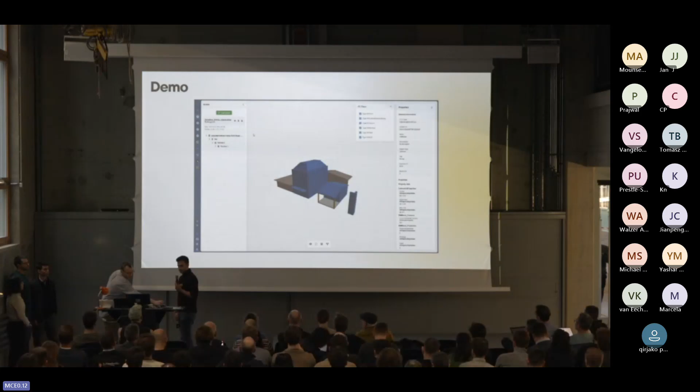So here's the interface. You can load your model here, and as you see, there's this 3D model generated from the IFC, sorry, from the IFC that is loaded.

And if you click this button here, all of the intersections are analyzed, and you can see all of them here, and also the type of connection, like point, surface, line, number of them, etc. And if you click on them, it goes into detail and shows you the connection.

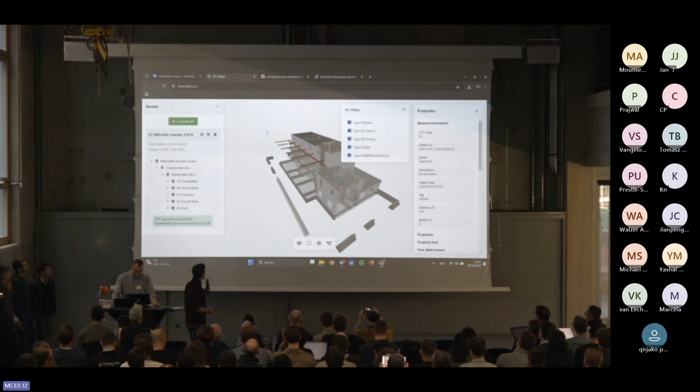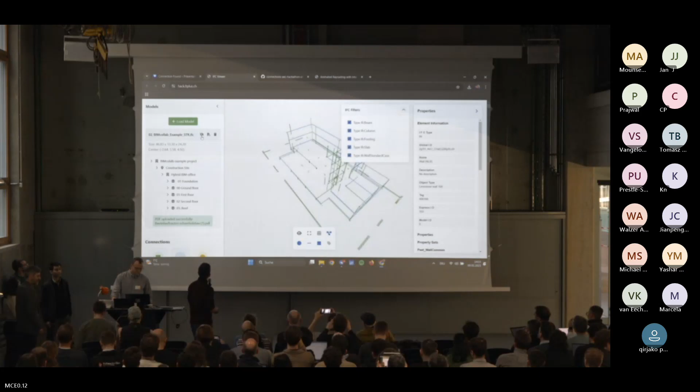Yes, that's it. Thanks. So I'll open the presentation again.

Okay, yes, sure. Sorry. So, pros and cons of the approach.

The tools that we use are all open source, so that's a big advantage. It is fast in loading and showing the preview, and it's also user friendly, as you see, so there's no high-tech knowledge required.

As cons, as already mentioned before, we have low precision for detecting the intersections. The tolerance was 10 millimeters, which can definitely be higher. And it is strongly IFC dependent, so if we get a high quality IFC, it would work perfectly fine.

Another thing I want to mention is that our team was also very multidisciplinary. We had timber engineers, software developers, computational designers, all of them in a loop, so we could evaluate this approach pretty well.

Just very quickly to wrap up, because we're out of time - what about the future? What we thought is that there are small improvements we could still do on relatively short notice.

But on the long term, what we think is adding a graph-based detection and categorization system together with historically tracking and matching the projects of the industry in general or the specific company, combining it with machine learning and LLM would be very beneficial.

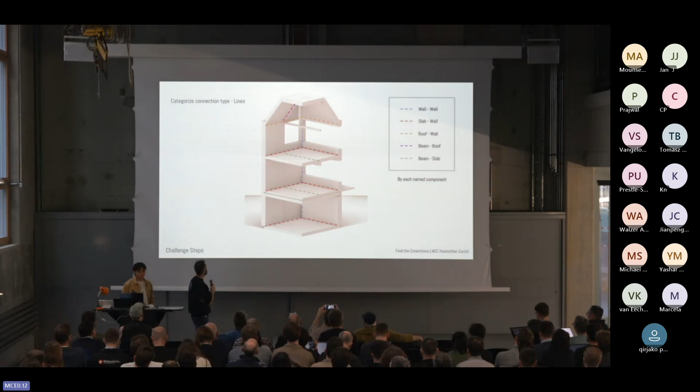And the third challenge was to find the connections and try to categorize them based on the elements that they connect and their geometry. We ended up working on one of those three.

This is the finding of the connections, and I'll let Yen now talk about the solution. So instead of ray tracing, we take more of an algorithmic approach.

First we extract the IFC data, then we get the geometrical data, and also the property sets. From here, we test the intersection, basically what is near, because in the IFC model each entity is not aware of what they are near to.

So from there, we create a new graph structure, and from this graph structure we traverse through it to get direct and indirect connections. In the ideal structure, it's like this.

We have the original IFC object, and through a dictionary we create a new node. The reason I create a new node is because I don't want to traverse through the IFC API. So I just create this graph structure, and then every node is aware of what is 'near.' In the future, you can turn this 'near' into a vector.

Not everything is just 'near' — it could be 'up,' 'down,' something like this. So while every element is aware of what surrounds it, one of the problems is that they don't know about a corner, because a corner is created when three elements join together. So we also have another algorithmic approach: we find a loop.

Basically, if there's a loop and the element comes back to itself in three steps, then there's a corner. So here you see the wall, node A to node B to node C. If node A is also reachable in the next step, then there's a corner there. One of the criteria is also that it has to be either a slab or a wall.

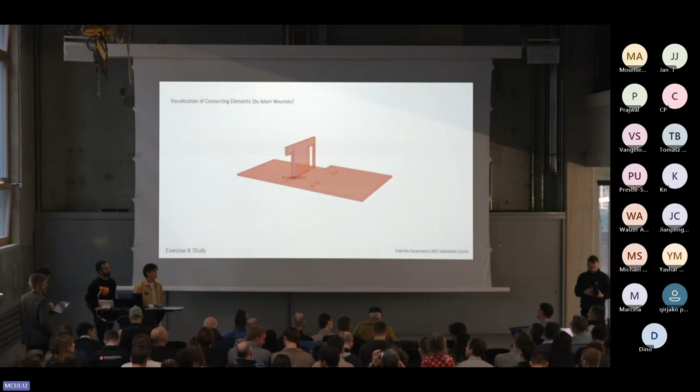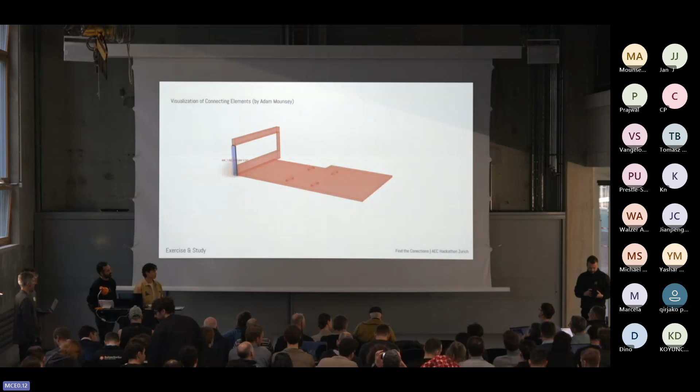Thank you very much. I want to ask again: the main problem you tried to solve was improving connection detection or interface detection in the IFC. You based it on geometrical rules, like a corner has 3 surfaces meeting, for example. Coming from an industry building a lot of free-form projects, that rule can be applied on standardized projects, but I had many where a corner was not defined by 3 surfaces meeting each other. How would you deal with that kind of problem geometrically?

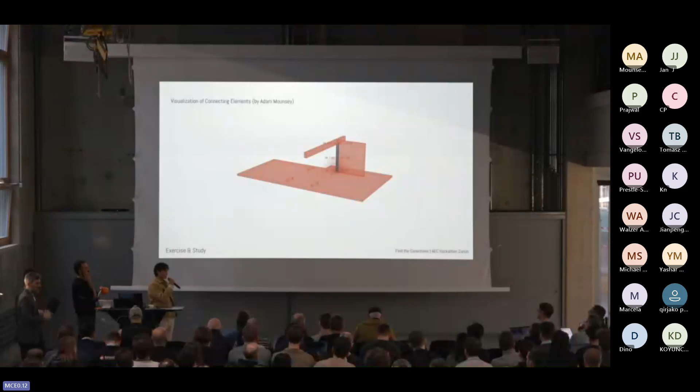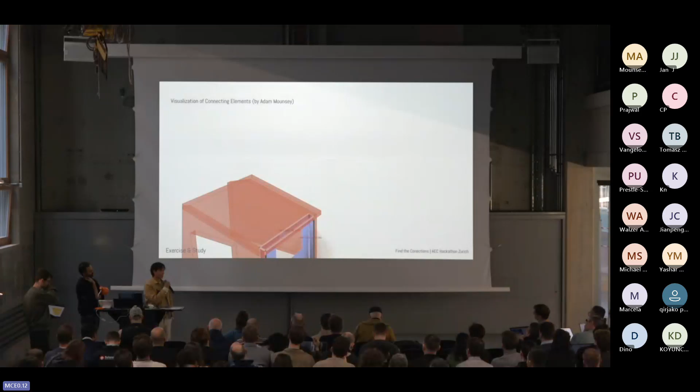Actually, when I mentioned a corner defined by 4 surfaces or even more, is that the question? I think the idea is the same. The idea was finding, at each step, when it returns to itself, and then we define that as a corner. So node A goes to node B, goes to node C, goes back to node A.

This is like a very common kind of wall setting. So A to B to C, and then back to itself, and then we say there's a corner, because there's also a slab and a wall in the middle. So I think the condition is basically how many steps you want to traverse before coming back to yourself, and whether it's going toward a slab. In that sense, we could define there's a corner. That was the generalization we did.

So in your case, if there are 5 walls running together, it would take 5 steps to see if you can come back to yourself. Maybe, but it might not be a wall—it could be part of the roof or any kind of element.

To get it correctly, you're building up a catalog of geometrical rules to identify your elements or interfaces. I think the challenge was that we need to identify where the connections are, and to do that we do it more in a geometrical way of finding the connections.

How far would that be an add-on to the project that we just saw before your presentation? Like, is the logic you're applying similar to what the project presented before you was referring to, with similar questions?

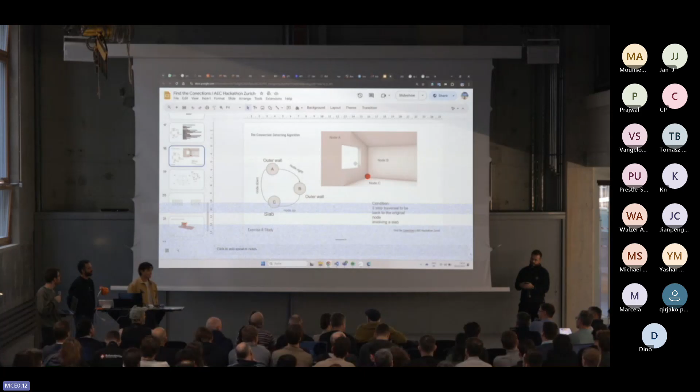One last question: I have a question regarding computational complexity, since you ran it on Google Colab, so I guess it's quite complex—did you measure it? Can you run it on your local machine? The main reason I didn't want to run it on my local machine is because I didn't want to set up the environment.

But you could run it normally? Yeah, of course, but also from the vector database query side, I didn't run it on my local machine because I didn't want to download the weights for the model. Okay, thanks. All right, thank you.

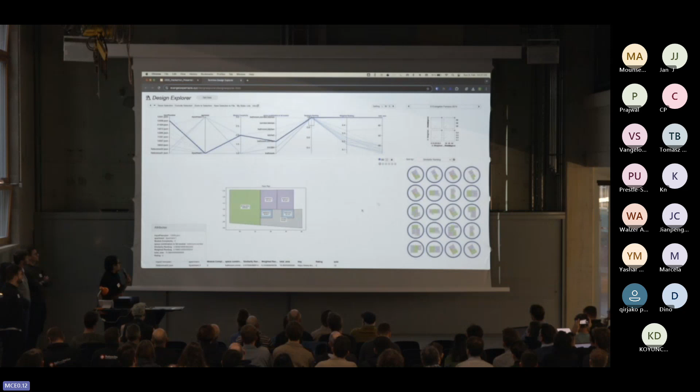Basically, if we have corridor, bathroom, kitchen next to each other, that's really good. You can also see other examples here—this is the perfect case, but we can also get something like this, where we have bathroom, corridor, and bathroom next to each other, which still matches quite well with your prefabrication. Then you can see how that floor plan matches with what you want.

All right, thanks, Diego. We have a minute left. We do have a couple more things we wanted to show, but I need to go back to the presentation. Unfortunately, I don't get it mirrored on my screen, but we'll get there.

All right, so you saw the demo. The next thing is another approach that Chris will summarize quite quickly. We cared not only about the adjacency and the graphs, but also the geometry itself, because it matters—like the metrics of the model.

So we prepared a few tools that may help with finding out what is the similarity between the designs, not only in terms of adjacency, but also in terms of geometric similarity. So the main algorithm works in such a way that first it finds the best alignment using an adapted ICP algorithm, which we had to adapt to ensure better alignment.

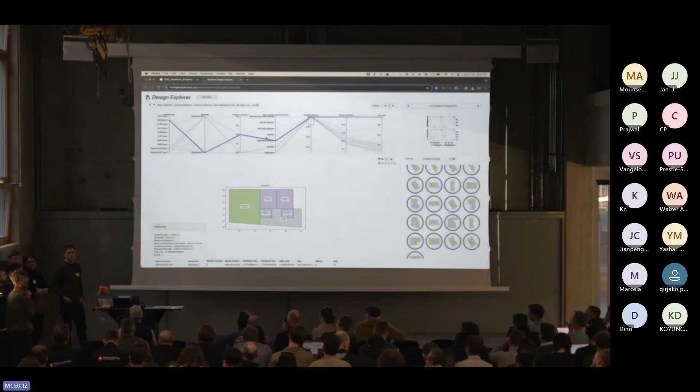And in the case of a design that is, let's say, the reference, this is almost 1, because that's like the target, what you see there: bathroom, corridor, bathroom. So if it's closer to 1, then you are more similar to that. If you're never close to 1, then we're weighting it a bit. And the optimization comes: okay, if you're not close enough, how much do you need to stretch?

So you're basically coming with a hierarchy. You say, okay, that's my priority 1, priority 2, and so forth. And then you basically go down, once something is set, you add other priorities. You improve the ranking. You start with a more dummy ranking, which is what I described, and then you're trying to refine it by, it's more optimal if you pack two bathrooms in the module. And then the other is if you're close to the area of the module given by Implenia, which is that monolithic block of a certain dimension.

As far as I understand, Implenia has some specific arrangements of the modules that work best for their designs, and the whole point of this is to see how the candidate designs fit in that system. So all the metrics are based on the reference which is best for prefabrication, and then we see how much we have to adjust the candidates to get the best solution. The challenge was to be able to take any plan, which is something maybe that we didn't translate geometrically, we convert it to a graph instead.

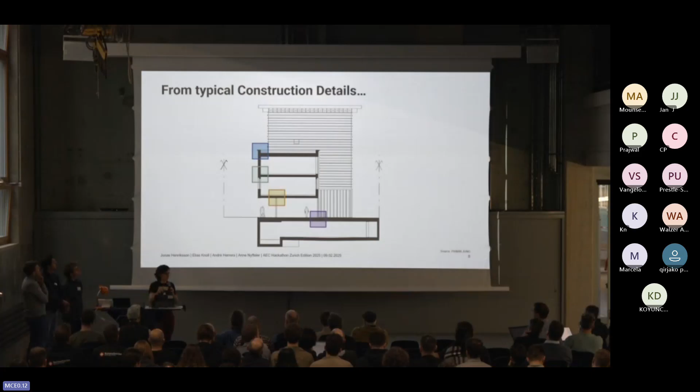It's just a very quick run-through in images. So this is the example we used: construction details, the workshop drawings, because in these detailed plans, technical drawings, there is the most information, the most knowledge.

We took 4 examples of typical construction situations and Jonas analyzed these images — first the graphical analysis, but then also did a text extraction to get keywords out of these typical construction details, to be able to recognize them with this neural network technology.

And we did get some success there. The training was improving — the loss was decreasing and accuracy increasing. And here, Jonas can take over to explain. Right.

Yes, so just to show how you can use the model: now the weights are frozen, and basically we have 4 categories that the model has been trained to identify. Loading the model, you just have to point to a PDF, which will be converted into an image format that we can analyze. And then we get the category out as an output.

So this can be interfaced with a chatbot, for example, through Langflow, so that the chatbot can give more relevant responses.

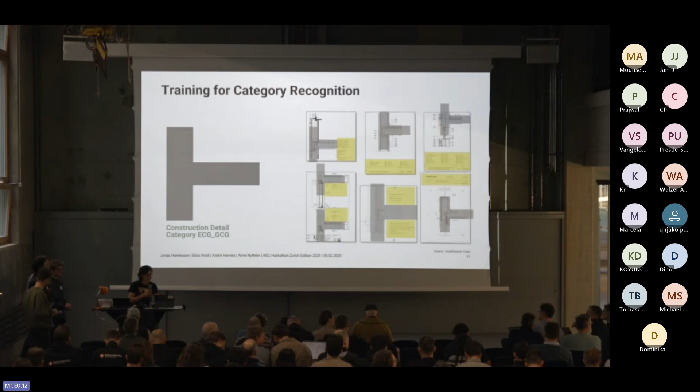Yeah, maybe just a little add-in here. That was the idea - one part was the information extraction that could be added to the training, and the other could be, if the category is recognized, to also add the specific category knowledge and train it again based on this, to ensure that it's really expert-knowledge based.

Maybe a last response - and this expert knowledge database can be increased. Like now, Anne filled in a lot of keywords, but we could make this into a platform to increase the information on different categories.